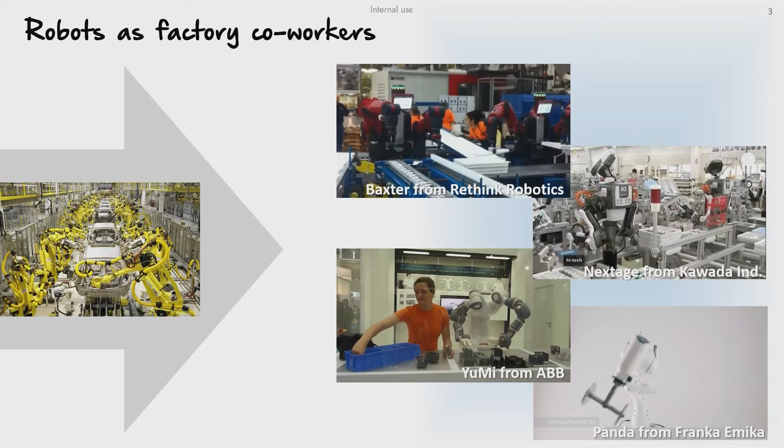First, we are interested in robot manufacturing applications for SMEs. For SMEs, you have a need that is very different compared to big industrial structures, in the sense that you need to collaborate with your robots and share the same workspace. You need these robots to be reprogrammed frequently because of short product cycles, multiple variants of products, and because we would like these robots to be used for different tasks.

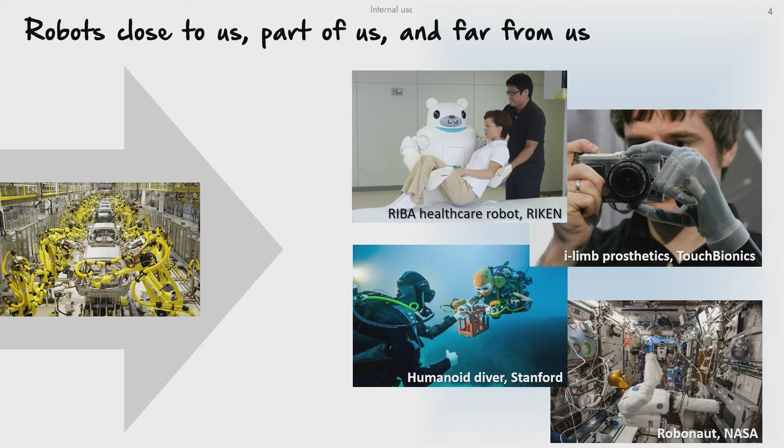We are also interested in other forms of robots that are here to assist us: robots that are close to us, parts of us, or far away from us. With robots close to us, we are interested in healthcare applications. Robots that are parts of us mean prosthetic hands, another form of robots. Robots that are far away from us means machines that need to work remotely, where ideally we would like the persons to feel as if they were on site. This can be, for example, a disaster situation, or remote places too difficult to reach, such as space missions or underwater missions.

In all of these cases, we need these machines to be reprogrammed. We don't know in advance the environments, we don't know in advance the tasks, and we would like to have personalized behaviors. This means we cannot use a standard computer language to do that. If we used the tools provided by robot manufacturers, we would have to code each time we want a new task, a new user, or a new environment.

Instead, our group does research in the field of imitation learning. We would like these robots to learn on their own by being taught by a user what to do — so to have learning from human demonstrations.

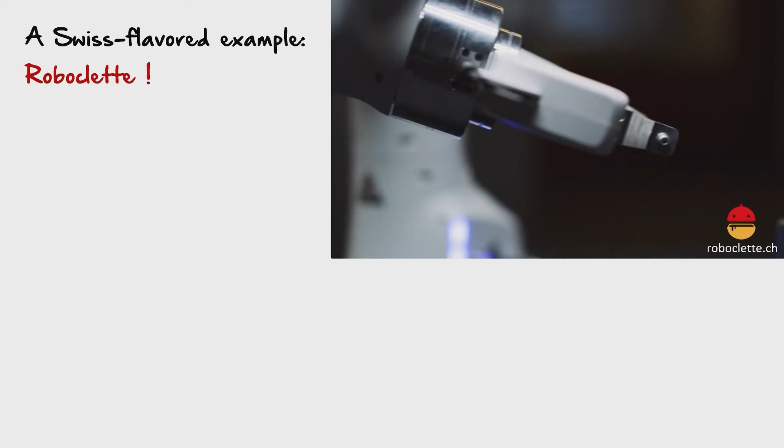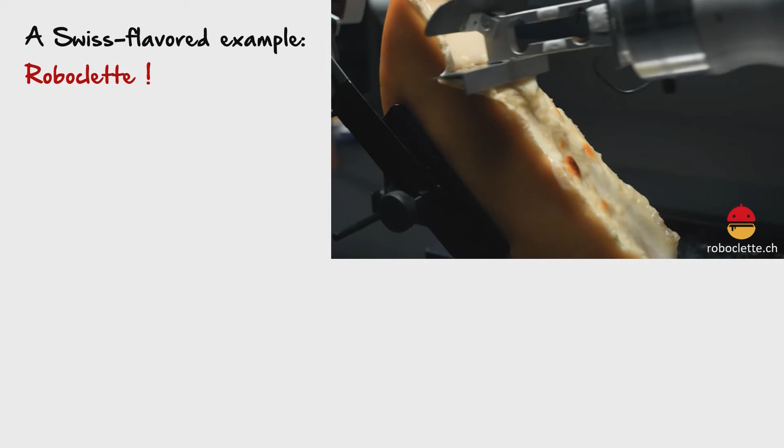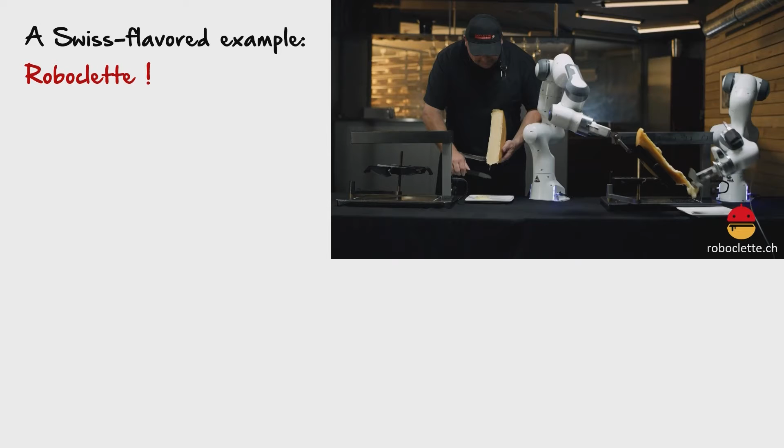Let me give you an example we developed a few years ago, about a robot that was taught how to scrape cheese off onto a plate. We called it Roboclette, and here a cheese master demonstrated this task. At the beginning we have a robot that doesn't know the task very well, as you will see on the video, and then the robot is being corrected. We have the cheese master here that will guide the robot by the hand, grabbing and moving it to demonstrate what to do. It's a very intuitive mechanism that can be used as a way to collect demonstration data.

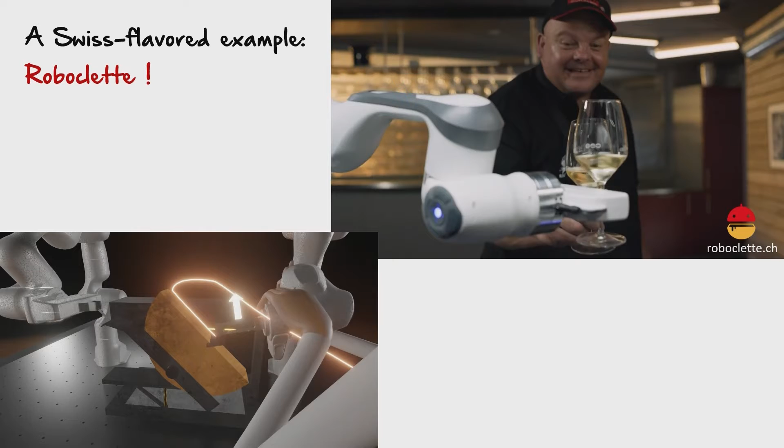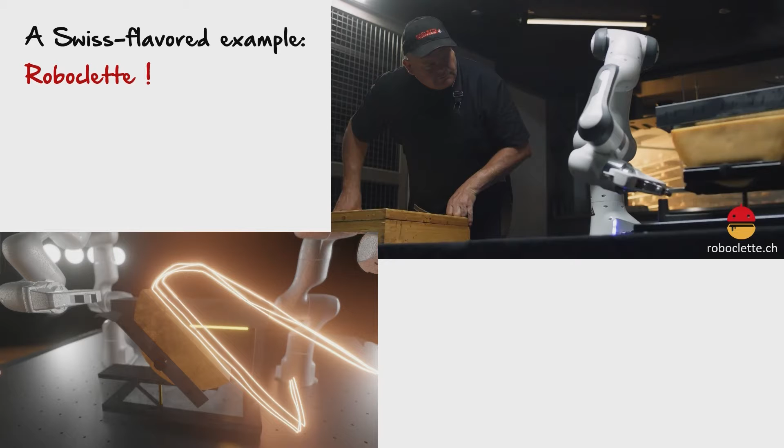This is the video with the animations about what is behind that. We have a robot collecting various sources of data: information about the movement itself through proprioception, and a force sensor that collects information about how much pressure we apply to the cheese. By providing about 10 demonstrations, we can also understand how to modulate the movement with respect to the size of the cheese. As the cheese melts while we are serving it, the height of the cheese will change, meaning we need to make shorter movements. Instead of programming that explicitly, we use the demonstrations to convey this information.

During reproduction we have this combination of data: one about the pressure to apply, the other about the dynamics of the movement — in this case a specific velocity profile required to do the task well. Later on, we get this generalization behavior so that the robot can scrape the cheese off onto the plate correctly. Obviously we don't use that only for this kind of application.

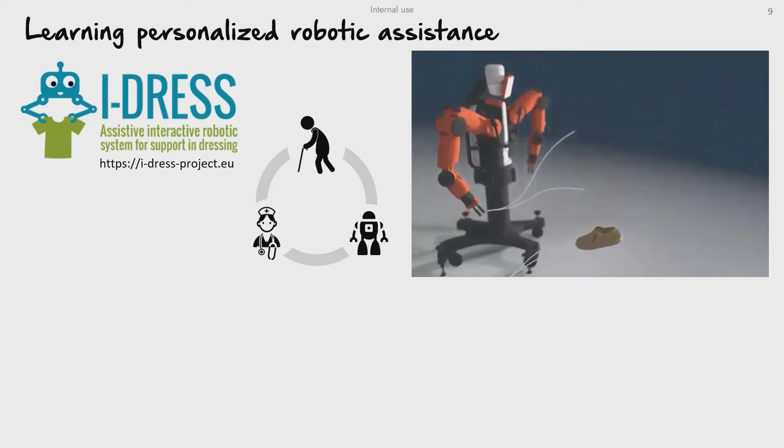We are interested in various forms of robotics, and one, as I mentioned, is assistive robots. I wanted to show an example with the I-DRESS project we have been working on, about providing assistance to users for dressing tasks. In these applications, what is challenging is that it's not only a one-to-one interaction, it's actually a three-party interaction. We have the caregiver or medical staff who needs to understand the requirement of the users, and this caregiver will provide demonstrations to the robot so that it can later assist the person with assistive dressing tasks.

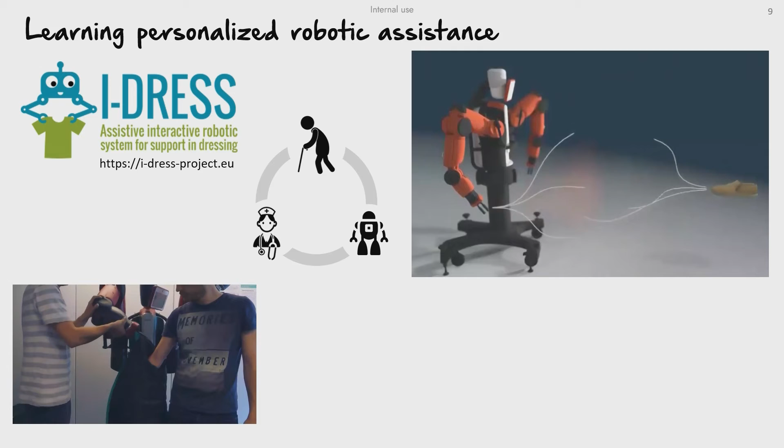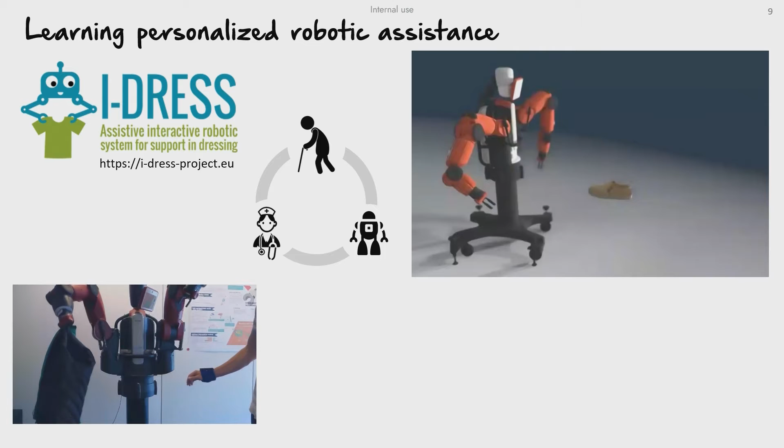I will show a few videos developed in our group. Here's a video from our lab, where we were testing how a robot can help put on the sleeve of a jacket. In this kind of task, we would like to have a force in the direction of the jacket, but the robot remaining compliant in other directions, so the user doesn't feel constrained. The challenge is to combine these different sources of information. We tested that with one sleeve or with two sleeves at the same time.

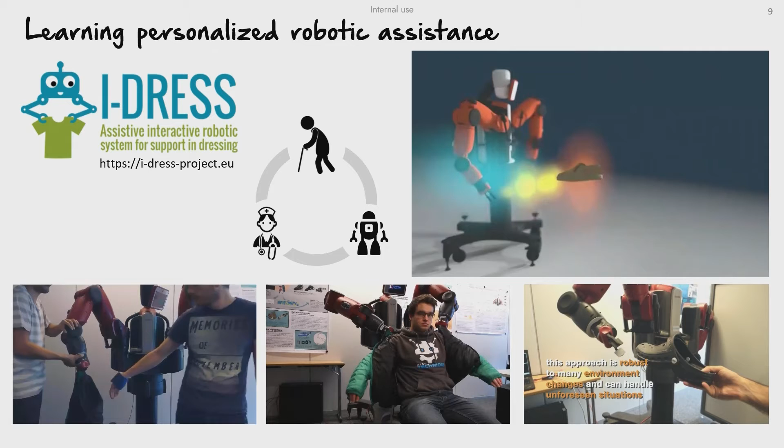We also explored how this could be applied to the scenario of a shoe, that we need first to grasp and bring toward the foot of the user, having this communication with the user in order to understand in a haptic way when they are ready to put on the shoe.

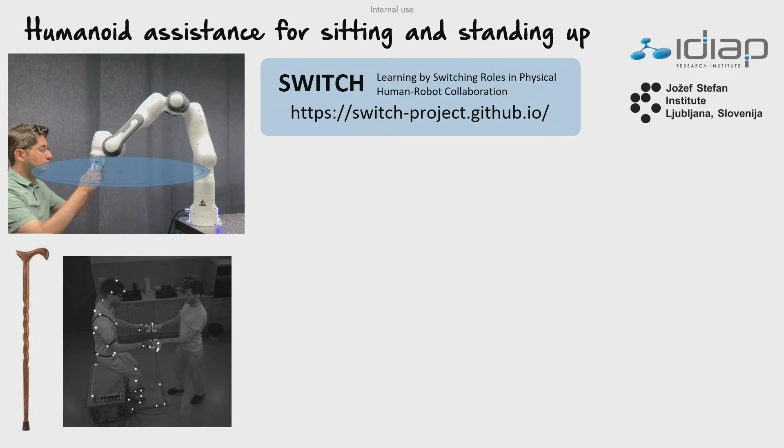Another example is a different project called Switch, in collaboration with the Jožef Stefan Institute in Ljubljana, Slovenia. This project is about helping someone to stand up and sit down. Here we also need forces, and this video explains the underlying problem and challenge. What we need is for the robot to be compliant in some directions but stiff in others, which means we can emulate a virtual cane — the user can place the cane where they would like, and by pushing on the cane, they get support to help stand up or sit down.

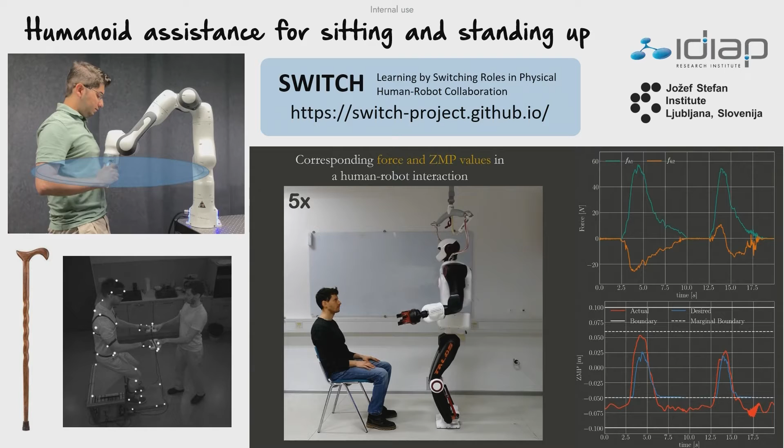So we applied that also to humanoid robots. Here it's with the purpose of having assistance that is not only for this specific activity, but to have a much broader range of activity that can be provided if you have robots in a humanoid shape. But from a research perspective, it's very complicated to do that because you have a robot that is not anymore attached to a table. You have a robot that needs to stand on its two feet and that needs to balance itself. So when a humanoid is on its own, it's somehow okay.

But if the robot also has to pull the user, then we need to understand what is the distribution of the forces and what is the correct behavior to adapt in terms of pose in order to assist the user without falling.

Then I also mentioned at the beginning of my presentation that we also would like to have robots working at remote places. And these are some examples of tasks like this where we need to teleoperate the robot, but ideally we would like to feel as if we were on site. So here it's the DexROV project, a big European project that was involving many partners. And we had the chance to work here with a bimanual underwater platform that was teleoperated from a teleoperation center.

So we had a teleoperation center far away. We had this virtual reality environment. And the goal for the user is to feel as if the task is easy. In reality, on the other side, under the sea, what will happen is that there will be perturbations. So if we need to turn this valve, what will happen locally is that you will need corrections in order to align the gripper of the robot with the valve.

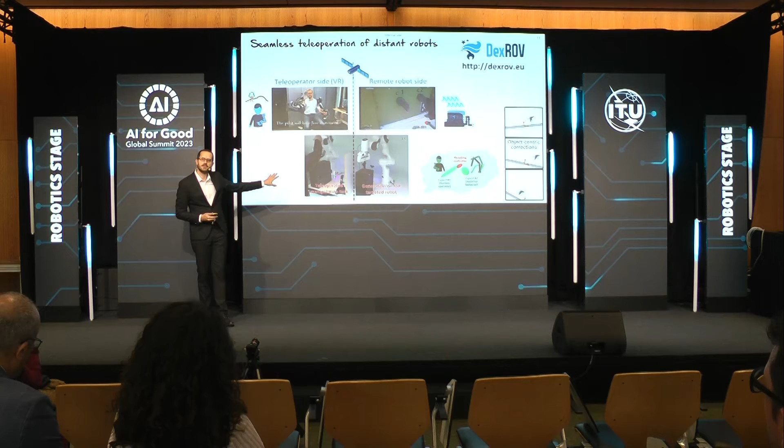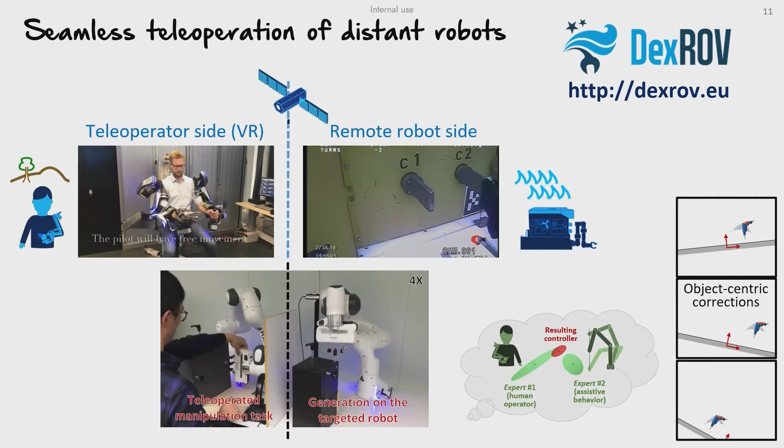At the bottom, you see a similar video, but this time in our lab, with two robots, one being used as input, the other one being used as output, so the one being teleoperated. And as you can see, the valves are placed differently, but even if we have this discrepancy in the locations of the valves, the user doesn't care. The user is doing the task locally, and on the other side, the robot will adapt.

Another point that is important for AI in robotics is to take into account that data in robotics are varied. It's not only about controlling joint angles. We have also data that is related to the location of the gripper or the hand of the robot. And this location is typically described with orientation data. We have also other objects that are also geometric, so we need mathematics behind to understand what is manipulability, what is stiffness, what is inertia.

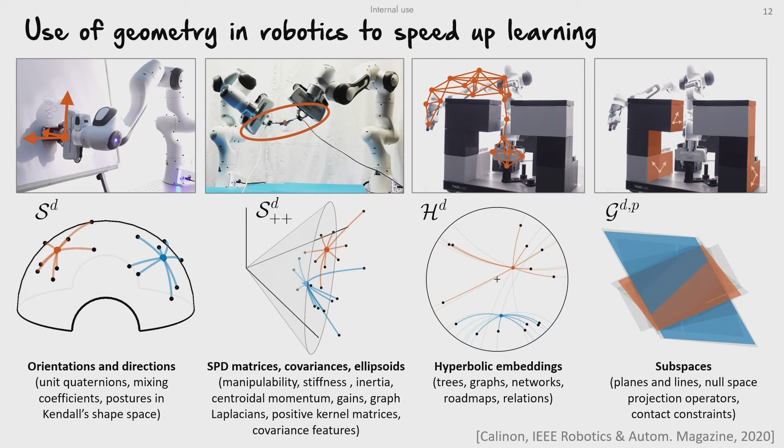We also need to transform the plans of the robot and to analyze the plans of the robot. And often these are also another mathematical form with trees, graphs, or networks that we need to encode in some way. And finally, we have another geometric object that is related to planes, lines, that we also need to handle.

So far, I was talking a lot about the learning algorithms that we need. But in reality, if we have only these learning algorithms, it's not enough. We also need software that is easy to use. We need tools that are easy to use, that are user-friendly. And it means that we need to think about what we should use. Like on the left side, you can see the teaching pendants that we have in industry, but that are bulky and difficult to use. On the right side, you have virtual reality headsets, which can be difficult to wear all day.

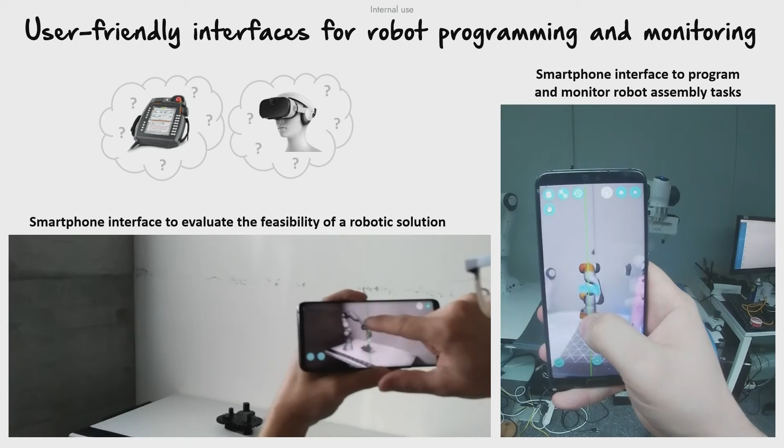What we are doing in our group instead is to consider smartphones as a device that we can use, that is easy to use, that is cheap, and where we can still use augmented reality capability in order to have a virtual robot being displayed, meaning that the user can monitor the task, can reprogram the robot, can detect what the robot has learned, and can make corrections before running the task on the real robot.

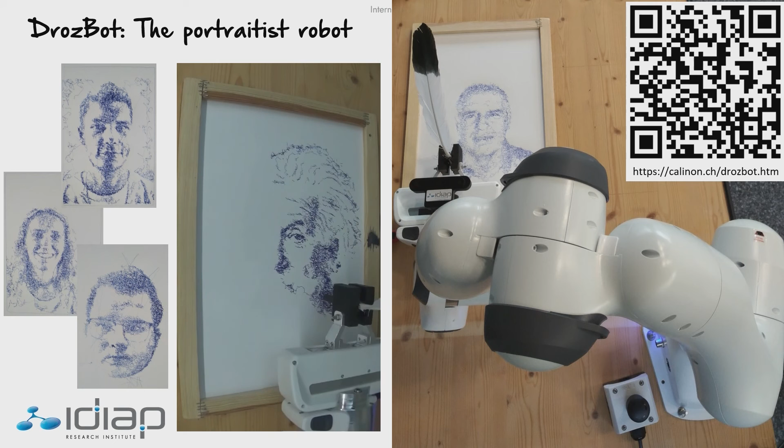So in this summit, we will present DrozBot. So you can see it. It's on the right side here. It's a drawing robot. We can explain there what we are doing. There is also some learning from demonstration aspects. It's a robot that is also exhibited at the UNIL-CHUV museum, Musée de la Main. It's an exhibition on AI. And here, the robot can also draw portraits, and the robot has been running here for about one year.